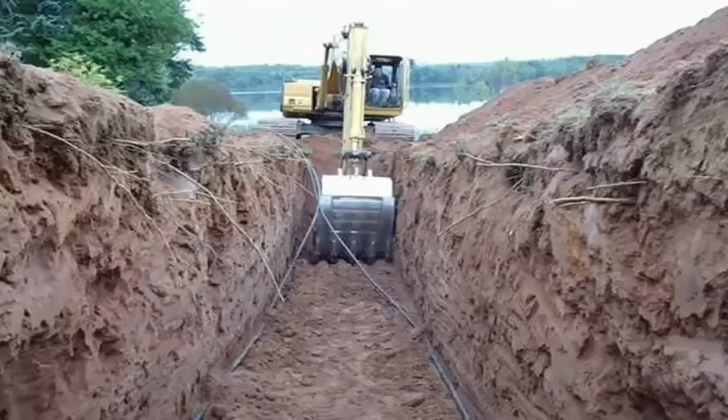The trench method is used where level ground is available. A long trench is dug out, 2 to 3 meters deep and 4 to 12 meters wide. The refuse is compacted and covered with excavated earth. So this is the trench. The second is the ramp method, where the ground is sloping, and the procedure is the same as the trench method.

Next is the area method. This method is used for filling land depressions, disused quarries and clay pits. Here the refuse is deposited, packed and consolidated in uniform layers up to 2 to 2.5 meters, and each layer is sealed on its exposed surface with a mud cover of at least 30 centimeters, because this covering prevents infestation by flies and rodents, and it also suppresses nuisance of smell and dust.

Here three changes may occur: chemical, bacteriological and physical changes. The temperature rises to over 60 degrees Celsius within 7 days, which kills the pathogens and hastens the decomposition process. Then it takes 2 to 3 weeks to cool down, and normally it takes 4 to 6 months for complete decomposition. So we have seen till here. The next method is incineration.

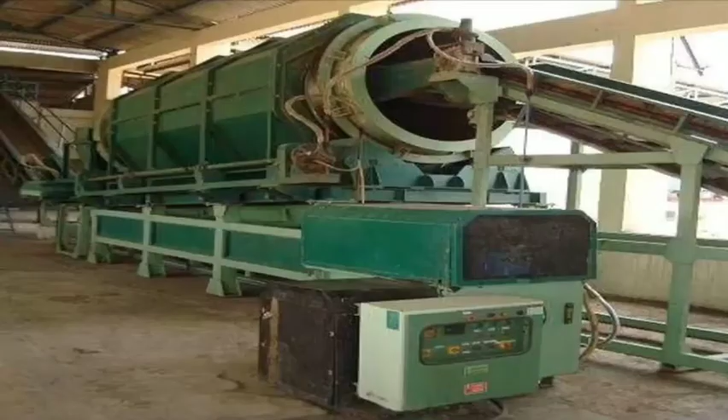The refuse is first cleared of salvageable materials such as rags, bones, metals, glass, and items which are likely to interfere with grinding operations. It is then pulverized in the pulverizing equipment, which will crush it, in order to reduce the size of articles to less than 2 inches. Then this pulverized refuse is mixed with sewage, sludge, or night soil in rotating machines, and it is incubated. This is the machine which is used for the mechanical method.

Here the refuse is first cleared of salvageable materials, then it is pulverized in pulverizing equipment in order to reduce the size of articles to less than 2 inches, and then that refuse is mixed with sewage, sludge, or night soil in rotating machines, and then it is incubated.

This is the machine. The factors which are controlled in operating are carbon nitrogen ratio, temperature, moisture, pH, and aeration. The entire process of composting is completed in 4 to 6 weeks. This method is used mainly in developed countries like Holland, Germany, Switzerland, and Israel.

The next method is manure pits. In rural areas in India, there is no system for collection and disposal of refuse. So refuse is thrown around the houses indiscriminately, resulting in gross pollution of soil. The problem of refuse disposal in rural areas can be solved by digging manure pits by the individual householders.

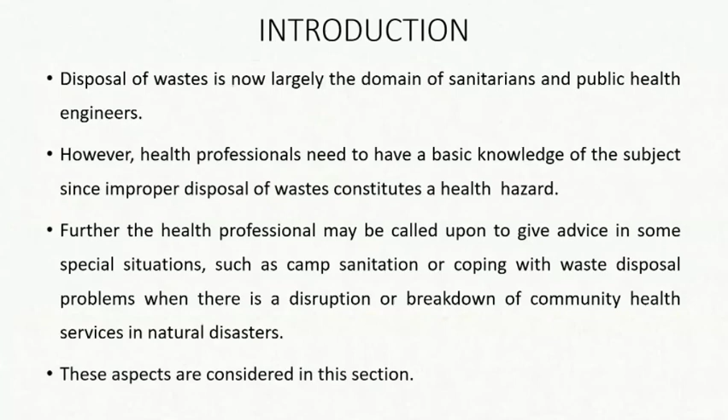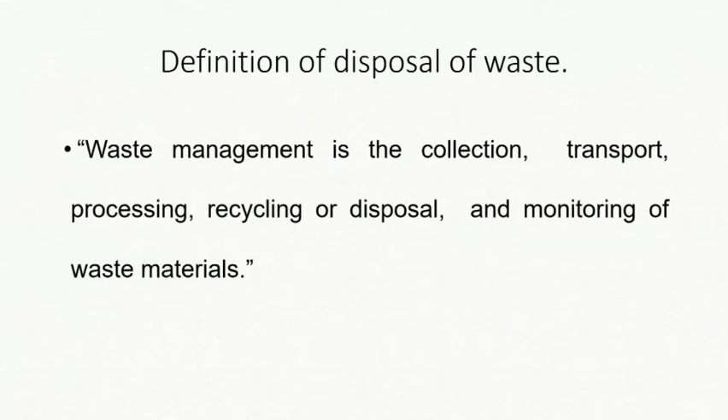So we have seen what is waste management. Waste management is the collection, transport, processing, recycling or disposal and monitoring of waste material. Then we started with solid waste. What is the term solid waste? It includes garbage, rubbish like paper, plastics, wood, metal, throwaway containers, glass. Also, it contains demolition products like bricks, masonry, pipes, sewage treatment residue like sludge and solids from the coarse screening of domestic sewage, dead animals, manure, and other discarded material. All this is included in solid waste.

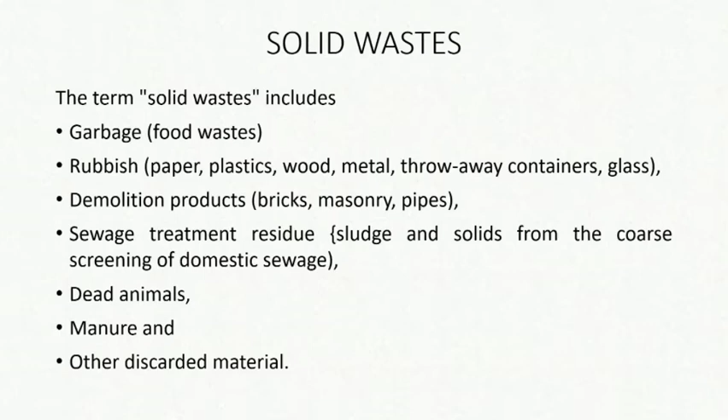The output of solid waste depends upon dietary habits, lifestyle, living standards, and degree of urbanization and industrialization. The per capita daily solid waste produced ranges between 0.25 to 2.5 kg in different countries. Then we have seen that if solid waste is allowed to accumulate, it will cause a health hazard because it decomposes and favors fly breeding. It attracts rodents and vermin. The pathogens which may be present in the solid waste may be conveyed back to man's food through flies and dust. Also, there is a possibility of water and soil pollution, and it has an unsightly appearance and nuisance from bad odors.

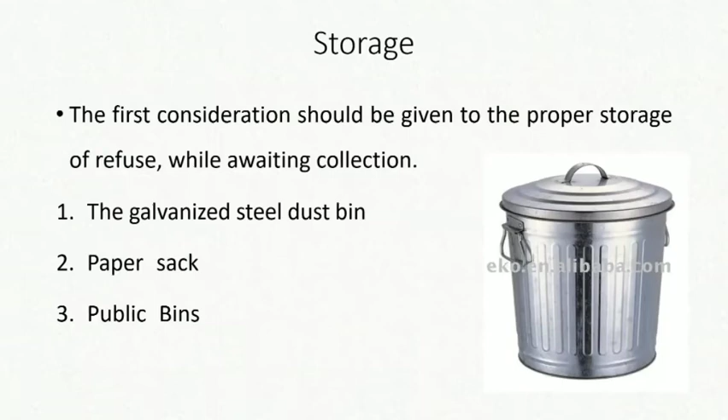Then we have seen sources of refuse: street refuse, market refuse, stable litter, industrial refuse, and domestic refuse. Then we have seen the procedure of waste management, which first includes storage. Storage should be done in galvanized steel dustbins, in paper sacks, or in public bins. The next step is collection. Collection depends upon funds available. There may be house-to-house collection. Also, some people dump the refuse in the nearest public bins. Then the next step is transportation, where the refuse is transported in refuse collection vehicles to the place of disposal.

Then the Environmental Hygiene Committee has recommended some standards for the disposal of refuse. They said that house-to-house collection of refuse should be done, that open refuse carts should be abandoned and replaced by enclosed vans, and that mechanical transport should be used where possible.

Then the last process is methods of disposal. We have seen there are a number of methods, and there is no single method which is equally suitable in all circumstances. It is based on local factors such as cost, availability of land and labor. So there are different methods of refuse disposal.

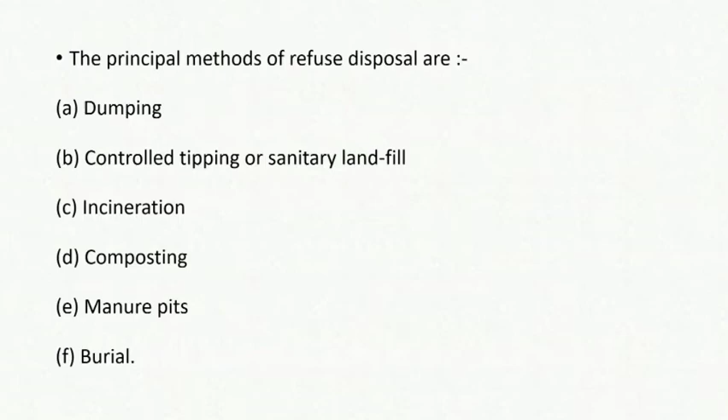It includes dumping, controlled tipping or sanitary landfill, incineration, composting, manure pits, and burial. So we have started with dumping. Refuse is dumped in low-lying areas. As a result of bacterial action, the refuse decreases considerably in volume and is converted gradually into humus.

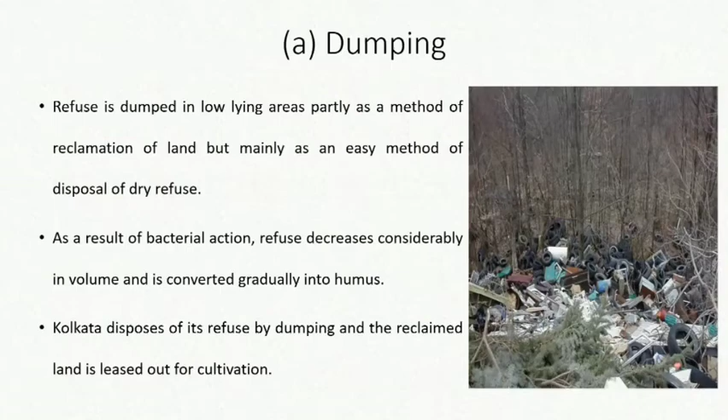But it has some drawbacks: the refuse is exposed to flies and rodents. It is a source of nuisance from the smell and unsightly appearance. The loose refuse is dispersed by the action of wind. The drainage from dumps contributes to the pollution of surface and groundwater.

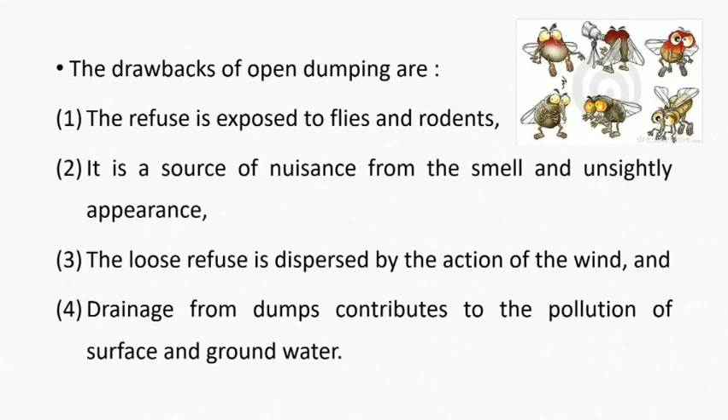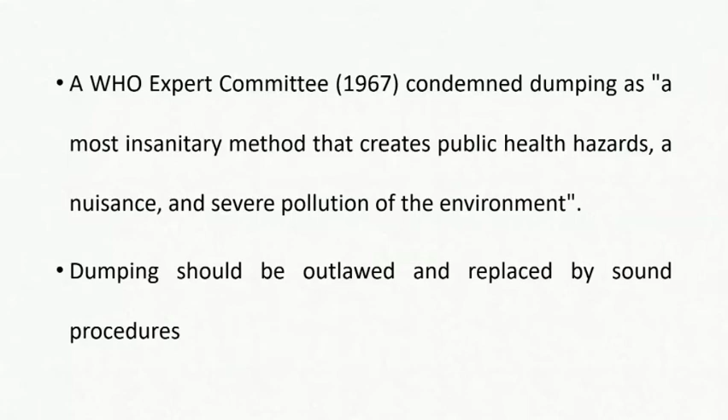So, the WHO expert committee says that dumping is the most insanitary method because it creates public health hazards, nuisance, and severe pollution of the environment. So, it should be outlawed and replaced by sound procedures. The next method is controlled tipping or sanitary landfill.

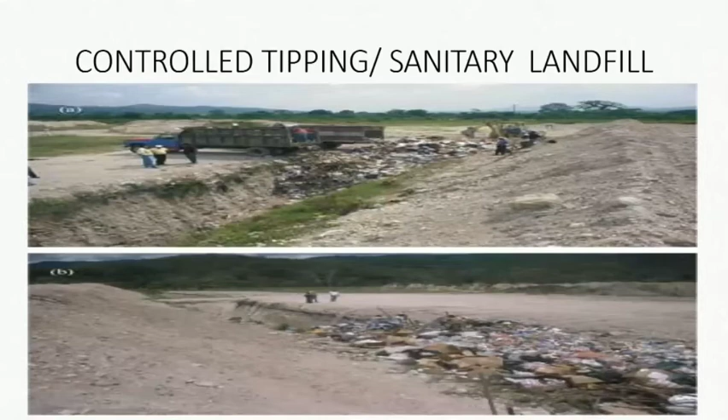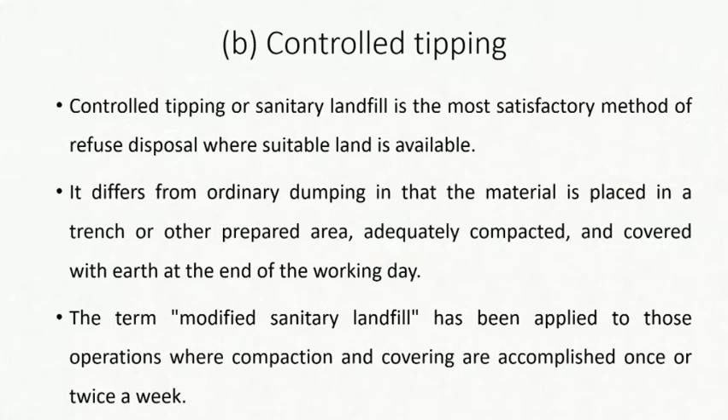Controlled tipping or sanitary landfill is the most satisfactory method of refuse disposal where suitable land is available. It differs from ordinary dumping because the material is placed in a trench or other prepared area, adequately compacted and covered with earth at the end of the working day.

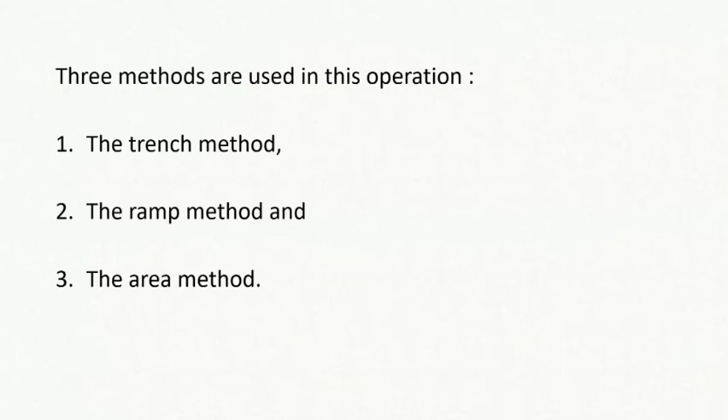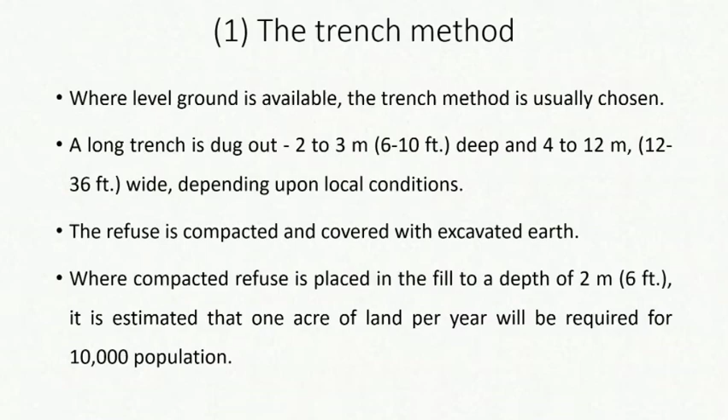There are three methods used for this: trench method, ramp method, and area method. The trench method is used where the ground is level. A long trench is dug out, 2 to 3 meters deep and 4 to 12 meters wide. The refuse is compacted and covered with excavated earth. So this is the trench. The second method is the ramp method, where the ground is sloping, and the procedure is the same as the trench method.

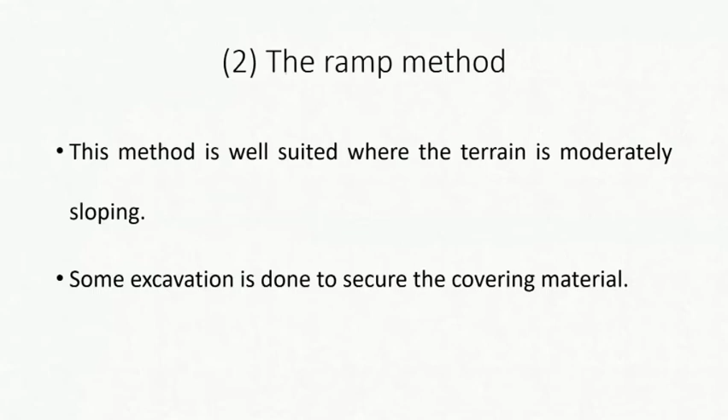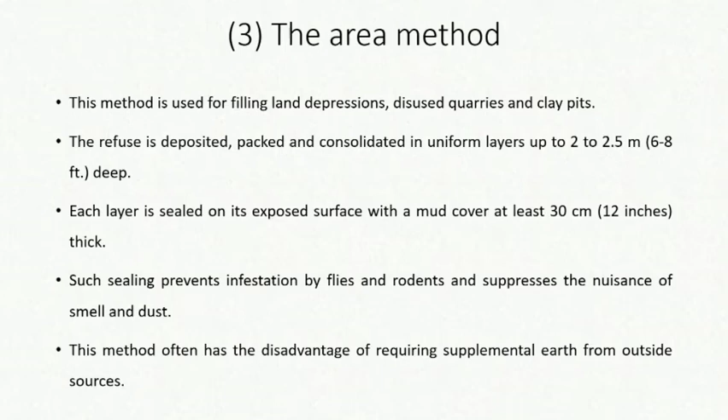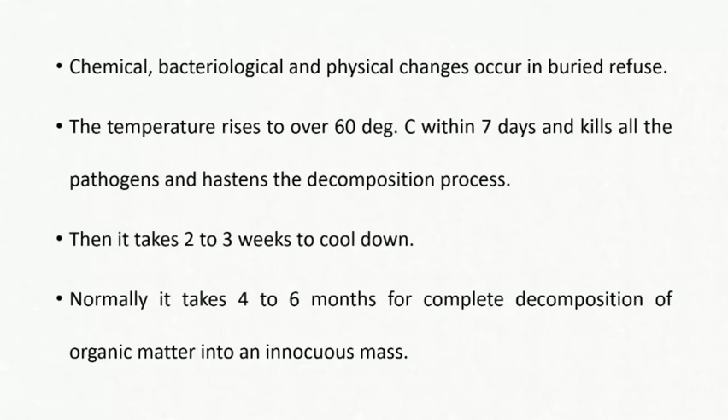Here three changes may occur: chemical, bacteriological and physical. The temperature rises to over 60 degrees Celsius within 7 days, which kills the pathogens and hastens the decomposition process. Then it takes 2 to 3 weeks to cool down, and normally it takes 4 to 6 months for complete decomposition. So we have seen till here. The next method is incineration.

Refuse can be disposed of hygienically by burning or incineration. It is the method of choice where suitable land is not available. If land is available, then we can use the second method, or composting. But if land is not available, then we can use incineration. Most of the time hospital refuse, which is dangerous, is best disposed of by incineration.

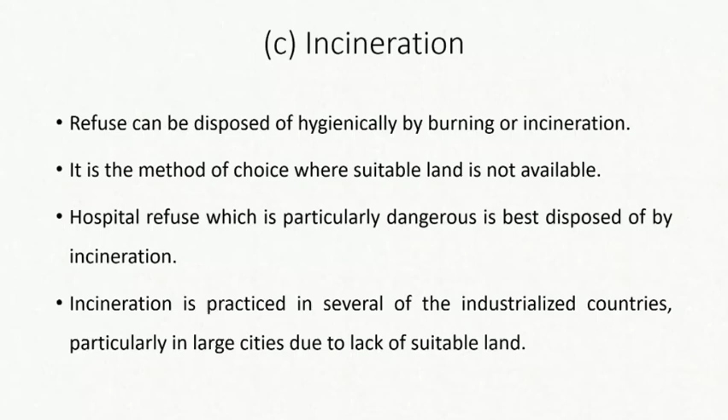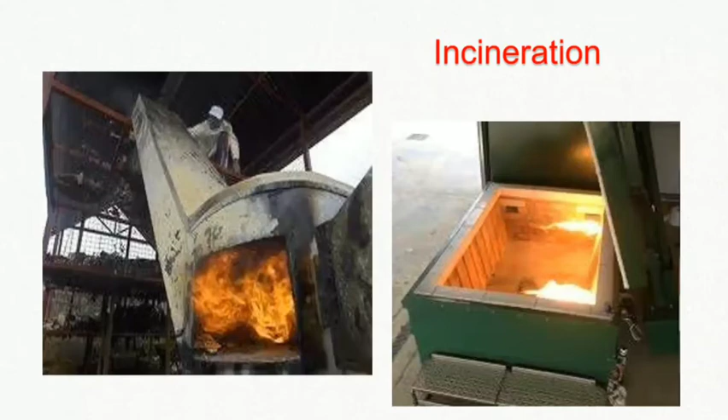Incineration means burning, jalne. Incineration is practiced in several industrialized countries, particularly in large cities, due to lack of land. So in this way, incineration can be done. It is not a popular method in India because refuse contains a fair proportion of fine ash, which makes burning difficult. So preliminary separation of dust or ashes is needed. All this involves heavy outlay and expenditure, besides manipulative difficulties in the incinerator.

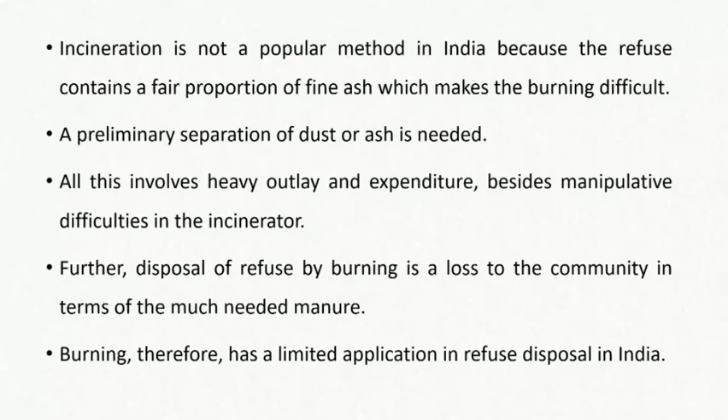Further, disposal of refuse by burning is a loss to the community. Why? Because in India, we use this waste material as manure. So if we dispose of waste by incineration, it is a loss for our community. So it is limited in India. The next method is composting.

So the first method we have seen is dumping, second is controlled tipping, then incineration, and the next method is composting. Composting is a method of combined disposal of refuse and night soil or sludge. It is the process of nature whereby organic matter breaks down under bacterial action, resulting in the formation of relatively stable humus-like material, called compost, which has considerable manurial value for the soil.

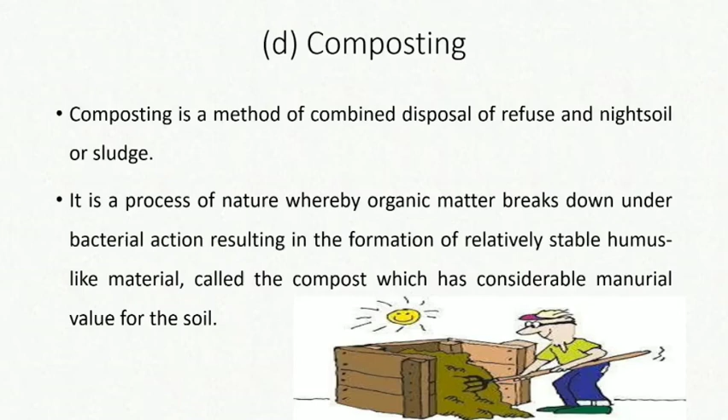So it is the process of nature where organic matter breaks down under bacterial action, resulting in formation of relatively stable humus-like material, called compost, which has considerable manure value for the soil. The principal byproducts are carbon dioxide, water, and heat.

The heat produced during composting is about 60 degrees Celsius or higher over a period of several days, which will destroy the eggs and larvae of flies, weed seeds, and pathogenic agents. The heat produced during composting is about 60 degrees Celsius or higher, which destroys the eggs and larvae of flies, and also the weed seeds and pathogenic agents.

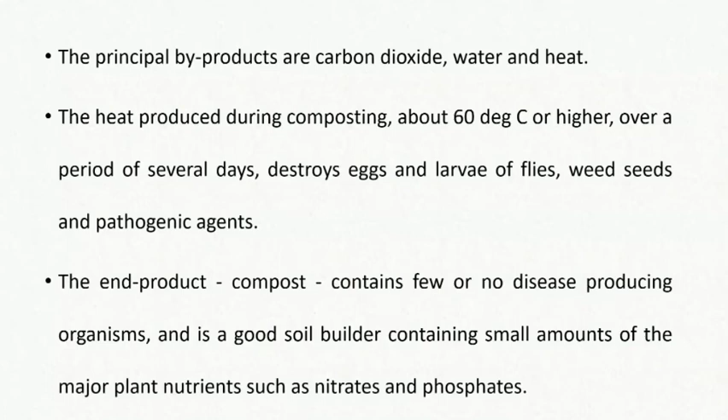The end product, that is compost, contains few or no disease-producing organisms, and it is a good soil builder containing small amounts of the major plant nutrients such as nitrates and phosphates. So compost includes major plant nutrients such as nitrates and phosphates.

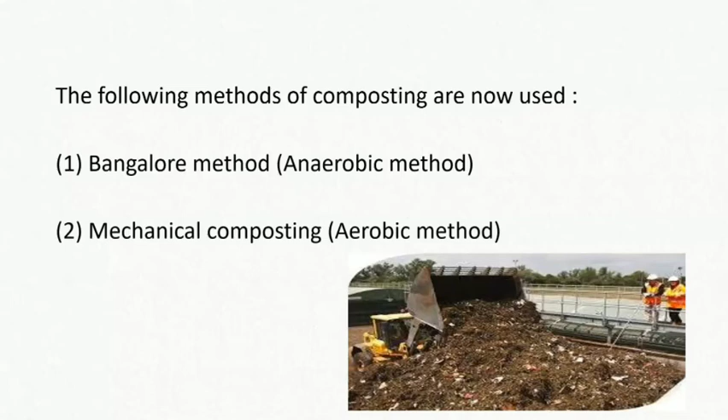As a result of investigations carried out by the Indian Council of Agricultural Research at the Indian Institute of Science at Bangalore, they developed a system of anaerobic composting. Since it was investigated in Bangalore, it is called the Bangalore method. It is also called the hot fermentation process. It has been recommended as a satisfactory method of disposal of town waste and night soil.

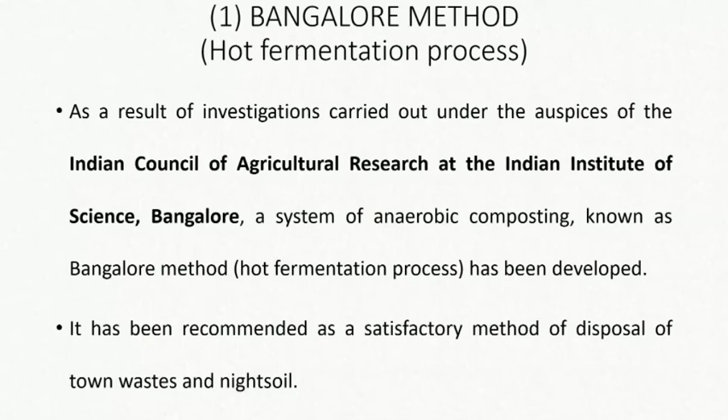In this method, trenches are dug about 90 centimeters deep, 1.5 to 2.5 meters broad, and 4.5 to 10 meters long, depending upon the amount of refuse and night soil to be disposed of. Depths greater than 90 centimeters are not recommended because of slow decomposition. The pit should be located not less than 800 meters from the city limits, so it should be more than 800 meters.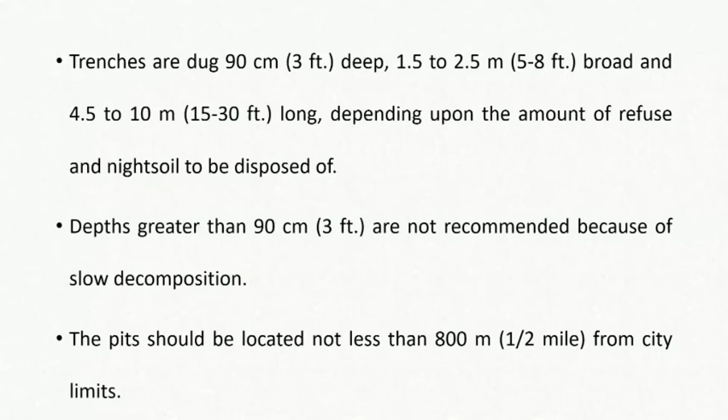The composting procedure is as follows. The first layer of refuse, about 15 centimeters thick, is spread at the bottom of the trench. Over this, night soil is added to a thickness of 5 centimeters. Then alternate layers of refuse and night soil are added in the proportion of 15 centimeters and 5 centimeters respectively, till the heap rises to 30 centimeters above the ground level.

The top layer should be of refuse, at least 25 centimeters thick. That means the last layer is refuse and it is 25 centimeters thick. Then the heap is covered with excavated earth, and if it is properly laid, a man's leg will not sink when walking over the compost mass.

So what is the procedure? The first layer of refuse, about 15 centimeters thick, is spread at the bottom of the trench. Then a layer of night soil, 5 centimeters thick. Then alternate layers of refuse and night soil, 15 centimeters and 5 centimeters. The heap should be raised 30 centimeters above the ground level. The top layer should be of refuse, at least 25 centimeters thick, and then the heap is covered with excavated earth.

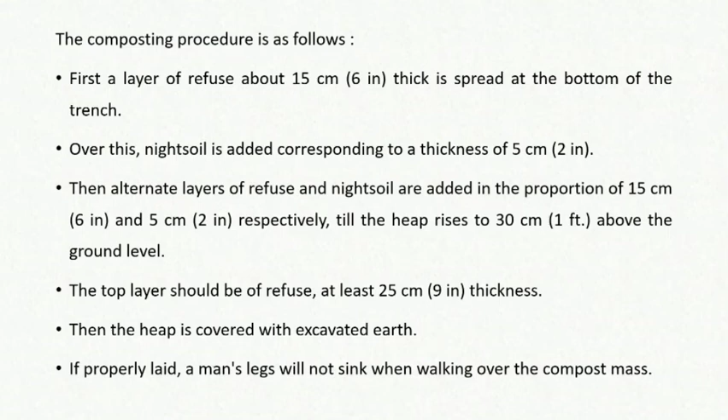Within 7 days, as a result of bacterial action, considerable heat, over 60 degrees Celsius, is generated in the compost mass. So it takes 7 days for the action of bacteria, which generates heat of 60 degrees Celsius or higher. This intense heat persists over 2 or 3 weeks. It serves to decompose the refuse and night soil, and it destroys all pathogenic and parasitic organisms.

At the end of 4 to 6 months, decomposition is complete. The resulting manure is a well decomposed, odorless, innocuous material of high manurial value, which is ready for application to the land.

You can see the trench in the image. The first layer is refuse, 15 centimeters, then night soil 5 centimeters, then again refuse 15 centimeters, night soil, and the last layer of refuse is 25 centimeters, and over that excavated earth. Decomposition will take 4 to 6 months to convert it into humus, good manurial compost, which will be used for the plants.

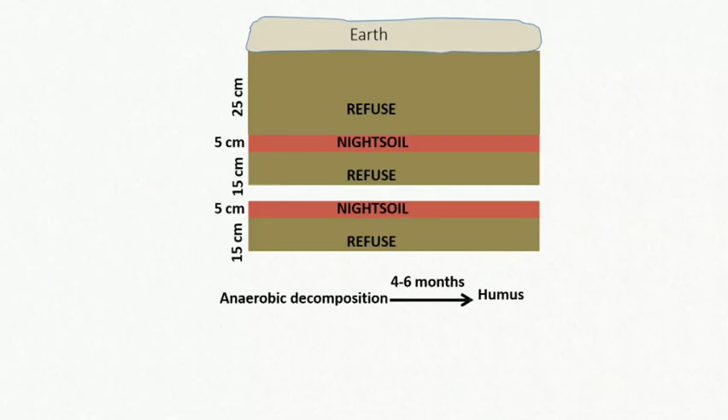The second method is mechanical composting, that is the aerobic method. The word itself suggests mechanical, meaning it is done in machines. So another method of composting is known as mechanical composting. In this, compost is literally manufactured on a large scale by processing raw materials and turning out a finished product.

The refuse is first cleared of salvageable materials such as rags, bones, metals, glass, and items which are likely to interfere with grinding operations. It is then pulverized in pulverizing equipment, which crushes it, in order to reduce the size of particles to less than 2 inches. This pulverized refuse is then mixed with sewage, sludge, or night soil in rotating machines, and it is incubated. These are the machines used for the mechanical method.

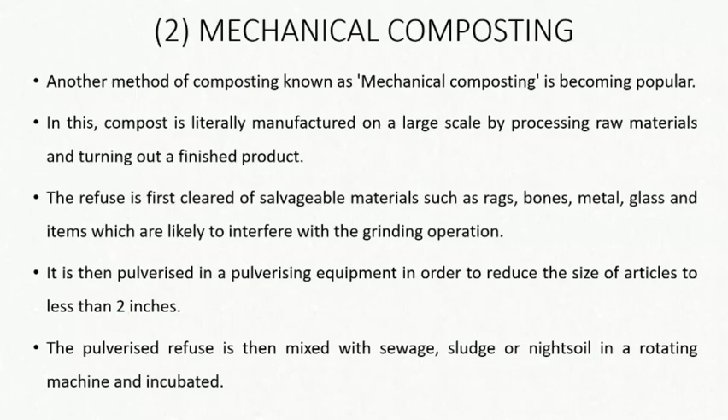This is the machine. The factors which are controlled in operating are carbon nitrogen ratio, temperature, moisture, pH, and aeration. The entire process of composting is completed in 4 to 6 weeks. This method is used mainly in developed countries like Holland, Germany, Switzerland, and Israel.

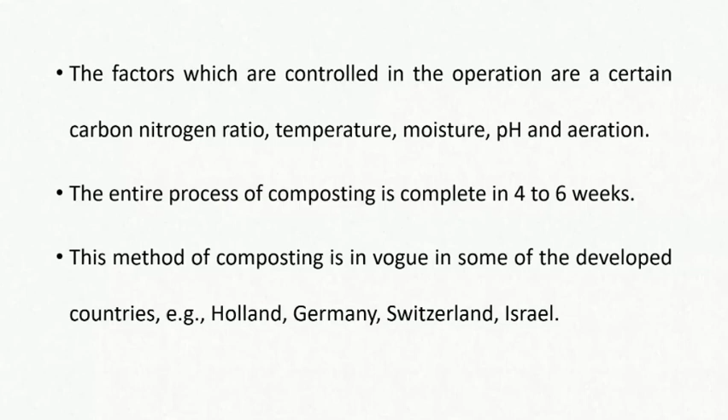The next method is manure pits. In rural areas in India, there is no system for collection and disposal of refuse. So refuse is thrown around the houses indiscriminately, resulting in gross pollution of soil. So the problem of refuse disposal in rural areas can be solved by digging manure pits by the individual householders.

The garbage, cattle dung, straw and leaves should be dumped into the manure pits, and it is covered with earth after each day's dumping. So in rural areas, there is no system of collection and disposal of waste. So they should dig the manure pits, and in them garbage, cattle dung, straw, leaves should be dumped, and that should be covered with earth after each day's dumping.

Everyone should dig two such pits, because when one is closed, the other will be in use. In 5 to 6 months time, the refuse is converted into manure, which can be returned to the field. This method of refuse disposal is effective and relatively simple in rural communities.

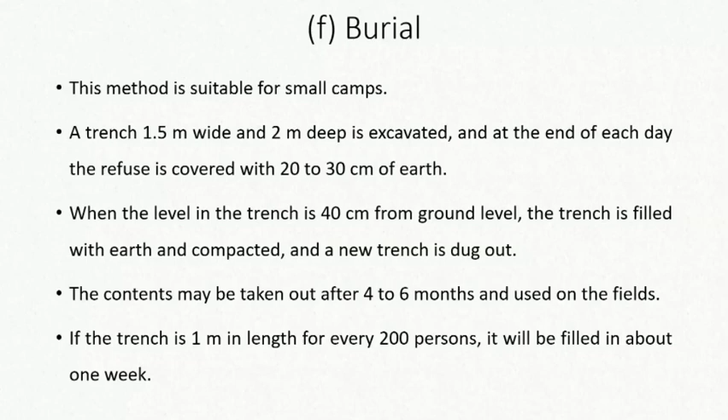Then last point, public education. Refuse disposal cannot be solved without public education. People have very little interest in cleanliness outside their homes. Many municipalities and corporations usually look for the cheapest solution, especially in regard to refuse disposal. So what is needed is public education by all known methods of health education, by pamphlets, newspapers, broadcasting and films, etc. It should be known to each and every person how to dispose the waste materials. Police enforcement of laws may also be needed at times.

Then economics and finance. If refuse disposal is to be carried out efficiently, hygienically, and economically, heavy capital outlay will be needed, whatever system of disposal is adopted. In the highly industrialized countries, up to 20% of municipal budgets are spent on the collection and disposal of solid waste.